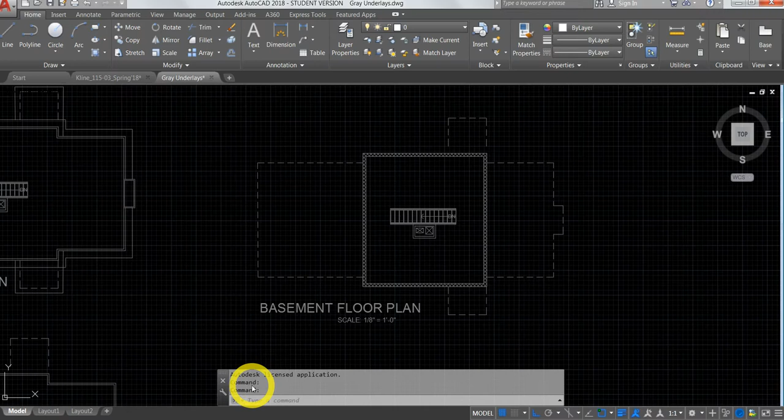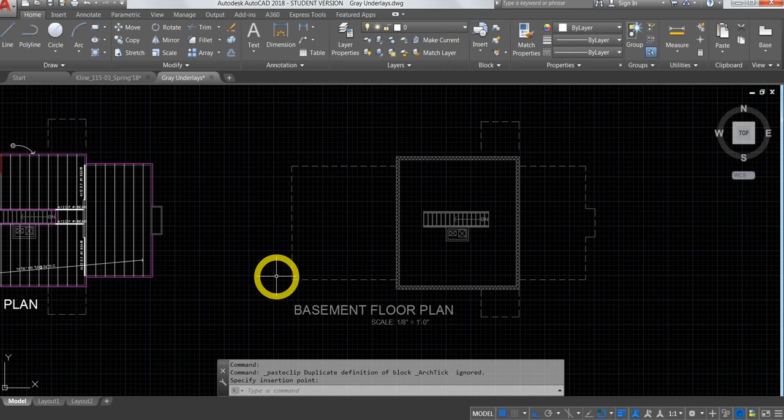All right, so I'm going to start again on a fresh gray underlay, and this time we're going to start with our basement floor plan. Let's just go ahead and highlight here. I'm going to copy, Control C, Control V, and just slide it over here for now. We're going to format these probably in the next video just to show you how I want these to print out. Okay, so now we've got our basement.

I'm going to make sure my 0, or just my white line, is turned on. So first I'm just going to go ahead and trace, because remember this is my outside wall, so I'm just going to draw a solid white line. This looks a little thick, but we'll fix that in a minute. Okay, so now this is the outside of my garage concrete stem wall. And again, if you want to refer back to this as you're drawing, it's great—this is page 43 of our packet E. But again, I just drew this outside edge, or if I were to even draw it here, of this stem wall right here.

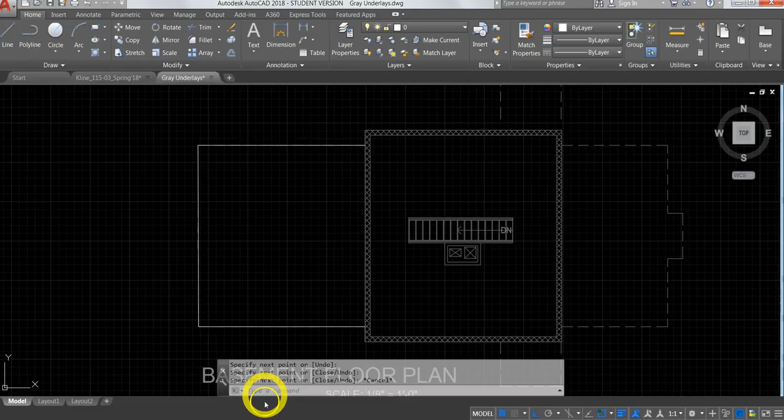Okay, so that's where we're going to start on all sides of our floor plan. And now that we've got one of those, we're just going to go ahead and offset this. I'm going to go ahead and offset this 6 inches to the inside. Click line, offset, 6 inches is highlighted, click, click, and click.

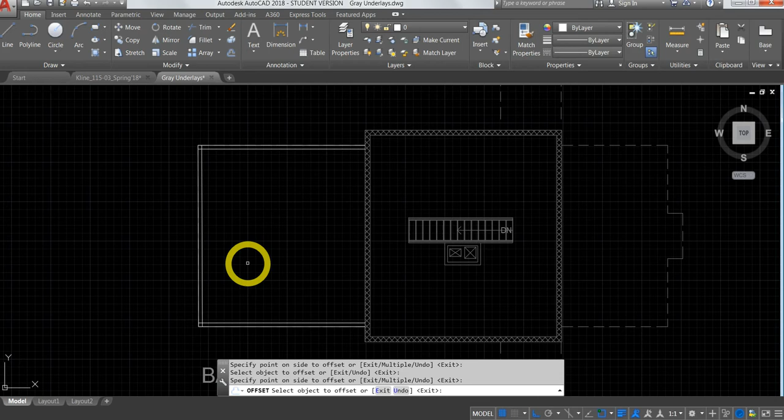Click and click. Okay, and once my offset tool is still highlighted, I'm just going to go ahead and draw in my footings that are going to be dashed below. So with my offset tool still selected, I'm just going to go ahead and type in 6—oh, you know, we're at 6 already, so we're okay. So this will make sense in a minute, but I'm just going to go ahead and offset another 6 inches from both lines. So we've got a lot of lines here, which is okay.

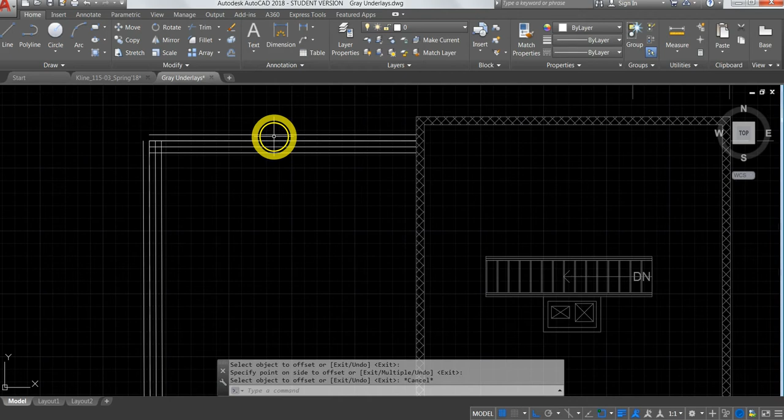Okay, and then the first step really is to clean them up, or to identify—but I just want to identify this outside line I just drew. So these outside lines are going to be our footing below that we're not going to see, so I'm just going to go ahead and make these dashed so they're showing up here.

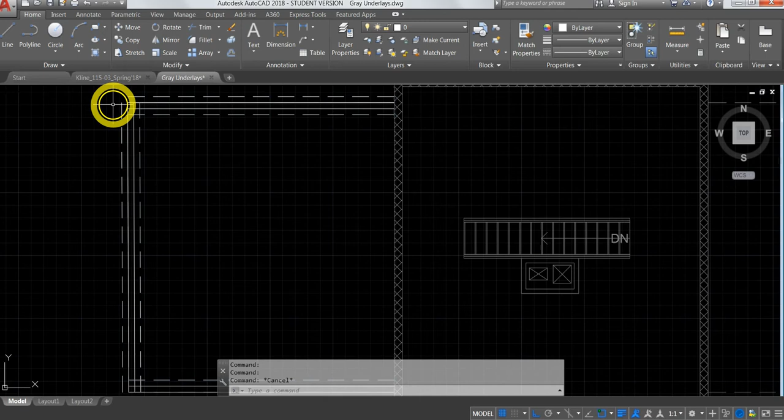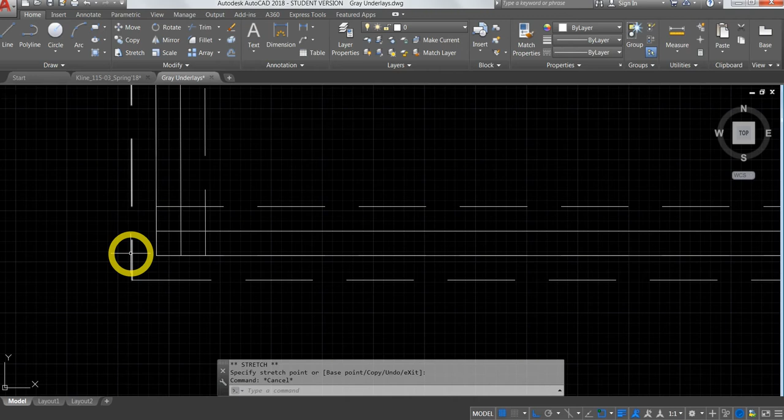There's not too much cleanup to do on these. The big thing—yeah, let's just go ahead and do it the quick way. So I'm just going to go ahead and drag this line over, and I'm going to do the same thing on my bottom corner. And then after that, I'm just going to go ahead and trim everything. Again, we've gone over this in class, but I'm just highlighting which line I want it to match up with, and I'm not clicking over it, just hovering over it, and then it gives me that little X. Okay, so now that we've got a bunch of lines, I'm just going to highlight all of them, go up here to my trim tool, and start cleaning up.

So again, I don't want anything coming inside—this will start making inside my stem wall. Cleaning that up here, cleaning up that here. So that's what a good looking corner looks like. Come down here, same thing—I'm just cleaning up all these lines.

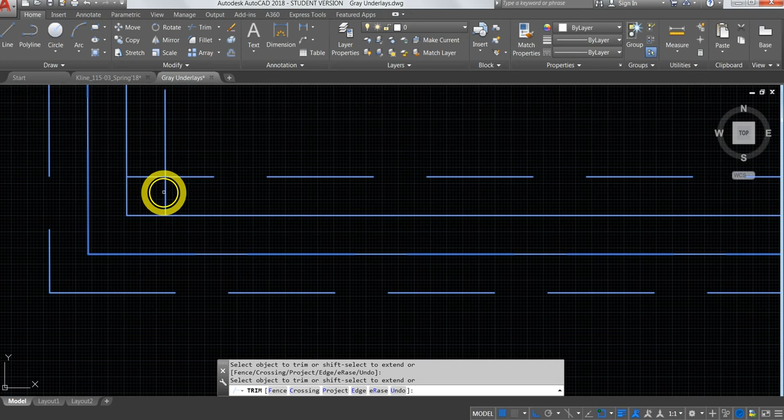Okay, hitting escape so I can see what it looks like. And I'm just going to go ahead and do this right away so you can start seeing what's going on. So I'm going to type hatch.

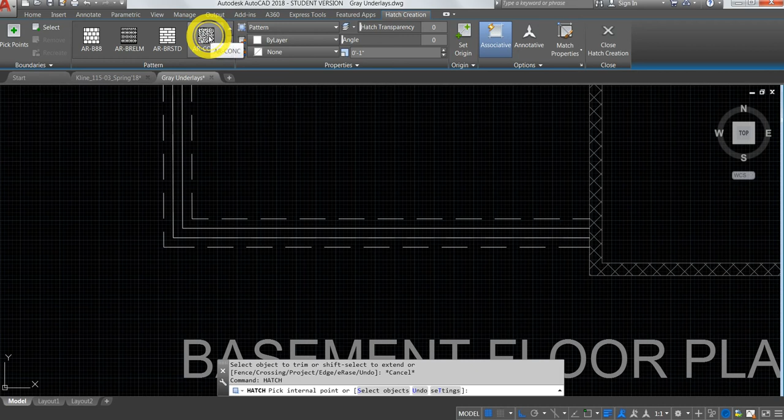The icon will show up, and I'm going to go down to concrete, AR Conc. I'm going to go ahead and click inside that area. So now you'll see we just created a concrete stem wall with a footing below.

We're going to do this exact same thing on this side. This thing's annoying, let's see if I can move this. There we go, yeah, it's the exact same thing. We're going to make our stem wall and our footing the same size over our crawl space.

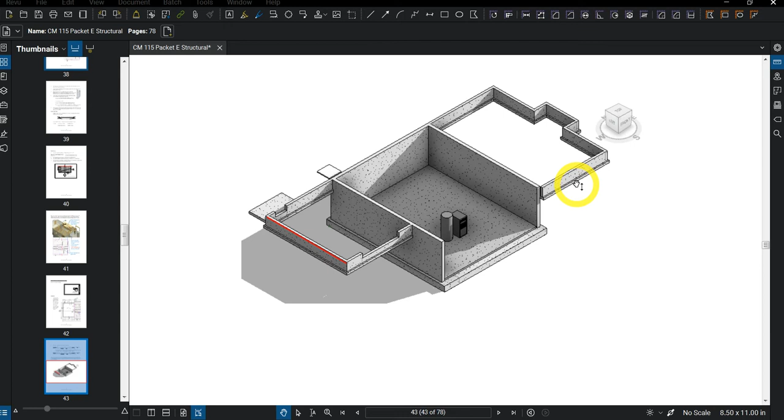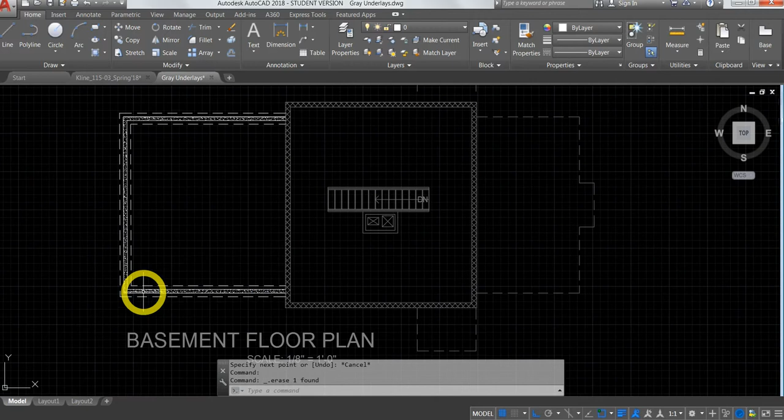We can go ahead and do that now. Just for the sake of time, we're not going to do that this class, but here's how this would look. Remember we have our garage cut out, so we would see another line here, vertical, and another line here, but don't worry about that. If you already did it, great, but don't worry about that. Okay, so same step over here.

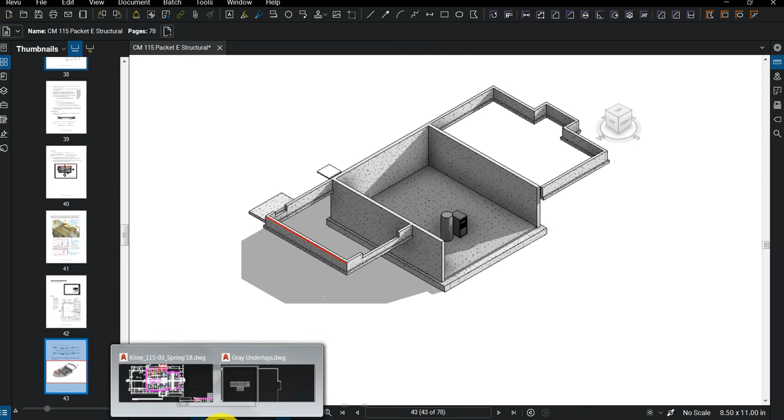So again, I'm just going to be highlighting my outside lines. I can be referring back to this, but you want to draw your footing all the way around your chimney. Yes, you may have brick going down, but I'm just going to draw it in because I think this is the right way to do it.

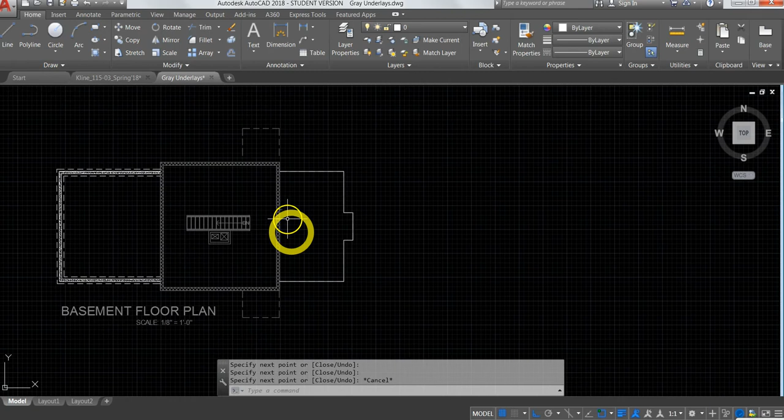Okay, same step. We're just going to go ahead. My offset tool is still turned on at 6 inches. I'm going to hit enter. This box shows up, so I'm offsetting outside, because that was highlighting the exterior wall.

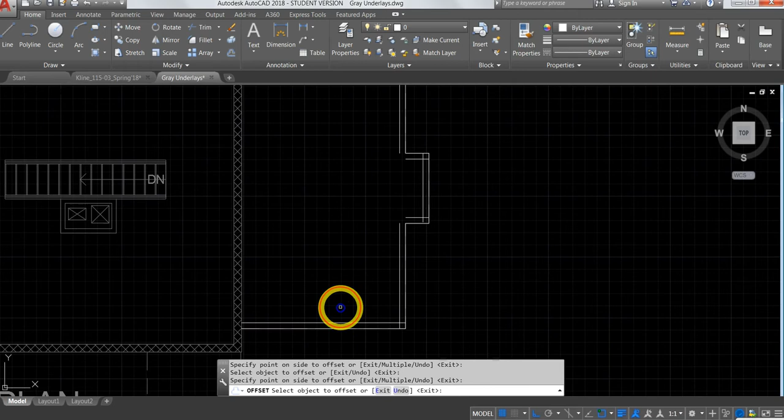Okay, and I'm not going to clean up these lines just for time's sake, but I'm just going to go ahead and draw my footing. Again, so I'm offsetting both outside lines. I'll clean up one wall. Offset everything.

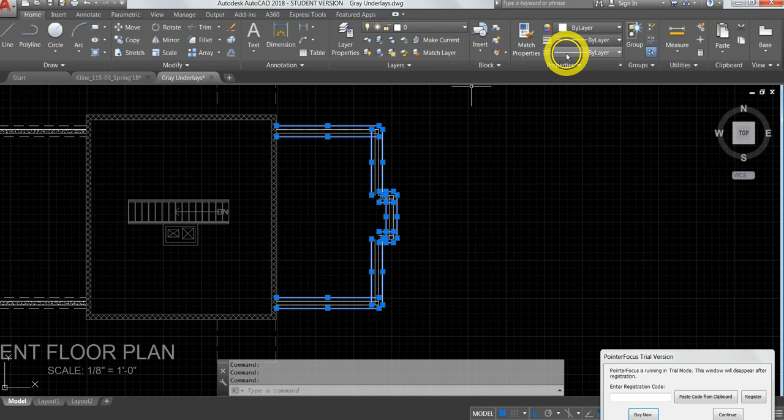Okay, and then kind of the same step. We're going to color the most outside lines dashed, because again, those are our footings below that we're not really seeing in our floor plan, but they're there, just like how you draw your details. Getting close. All right, I'm going to make these dashed lines, and again, go ahead and just clean them up just like the other one.

I'm going to clean up a corner, but make sure you just clean up everything. So again, I don't want anything showing up inside my stem wall. Cleaning up these corners.

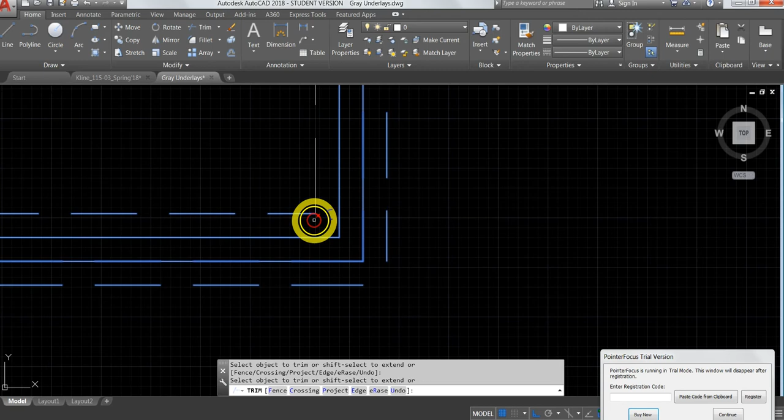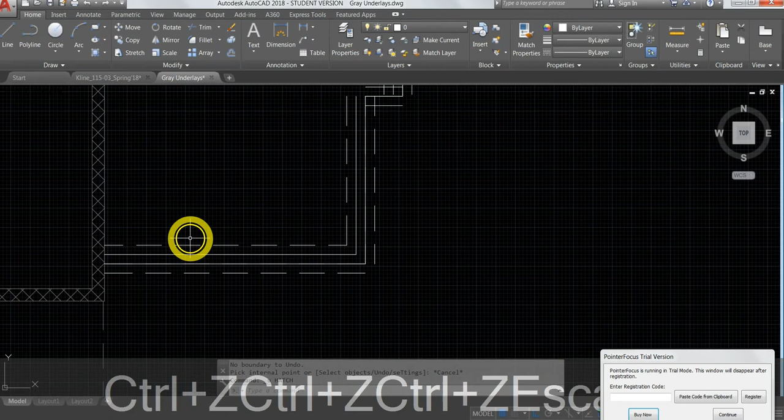A quick check too, you could even just leave those dashed lines as is, but those look pretty good. When you go to hatch, which I'm going to right here, after you clean up all your lines, if I click inside this footing - see, it looks like I forgot to tell you, make sure you close off your box over here. It won't sometimes recognize the gray. Oh see, and I didn't close off over here.

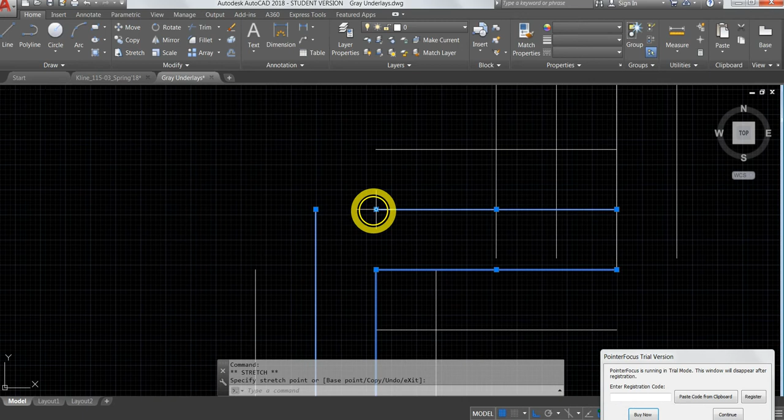Awesome, so I did a great example. I'm just going to go ahead and close off this one so I can show you how the hatch should work. So again, once you clean up everything - I haven't, halfway done - whoops, hatch, there we go. And if you click inside this area, it'll only go to what's enclosed. So once you're cleaned up, it should do the whole footing automatically.

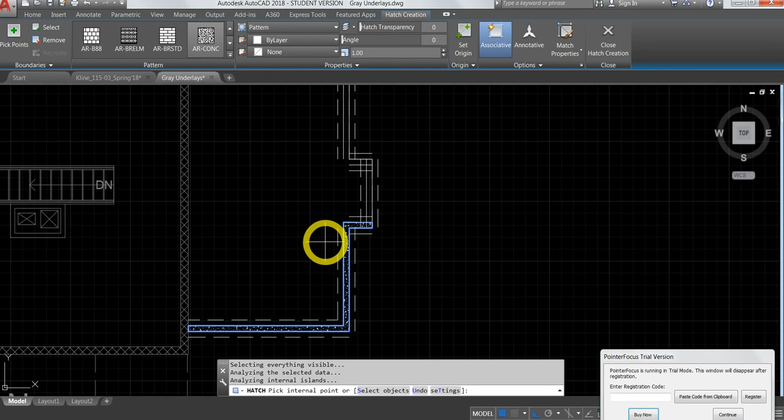Okay, so those are really our stem wall and our footings for our two major sections. All we have left to do, I put in this hatch pattern for you already, so what we're going to do is highlight the whole thing right here, and just highlight these lines as well. I want all my perimeter lines for this, and we're going to go ahead and color these white. Make sure those are white. You do not need to draw over or gray your gray lines. Just go ahead and change the properties.

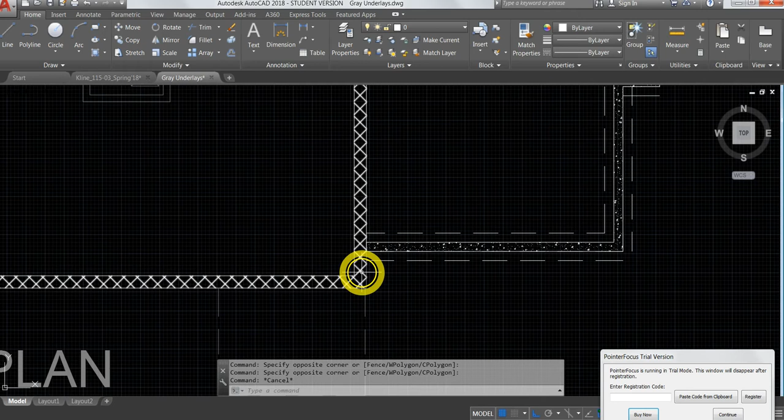It looks like I missed a few. That's okay, just check, let's see. Yep, I missed a few lines, but make sure these are all white so they're popping up.

Okay, then all we have left to do on our main house is draw this basement footing. This basement footing, as you remember, was a little bigger - it's a retaining footing. I don't have my notes in front of me, but I think it was a 12-inch heel and then 4 feet from the outside face. So that's what we're going to do.

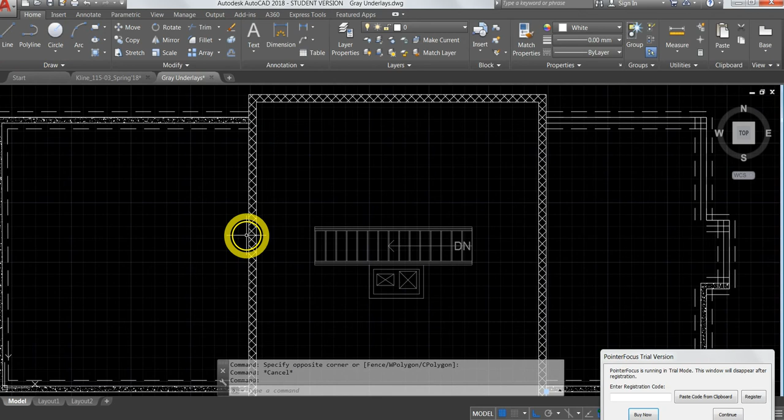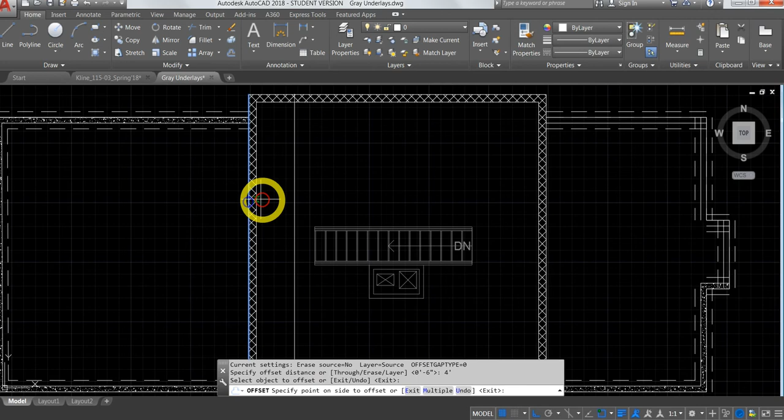Do whatever you want, all we want to show up right here, which I'll show you, is this footing. Since it's retaining, I'm going to go ahead and offset that wall first. I'm going to highlight this outside face, and I'm going to do this 4-foot one first, just so you can see how extreme this looks. So 4 feet - clicking on this outside wall and dragging it in.

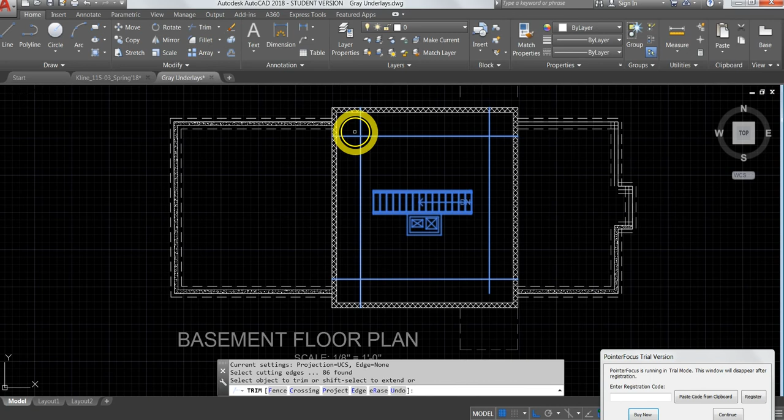Looks like I picked a bad line, but it's totally fine. Now what we're going to do is highlight these and go to trim. We're going to trim these. And this is where the center line method comes into play, because this bearing footing extends so far into our house.

I'm just going to go ahead and highlight these lines and make them dashed. Then all we have left is to offset the outside footings as well. So 12 inches here, same thing on the outside. Seems a little big, that's okay, let's stick with it. 12 inches in all directions.

So again, we're going to clean up all these lines and connect them to each other, which I'm not going to do, and then leave them as is. Now we are showing pretty much all of our footing systems. Now we're going to go ahead and draw in. We don't have a ton of floor framing to show.

Again, porches will be extra credit if you feel like you need it or want it. But I'm just going to go ahead and draw it without the porches. Sorry, I'm scrolling through my notes here, can't be dual screening here.

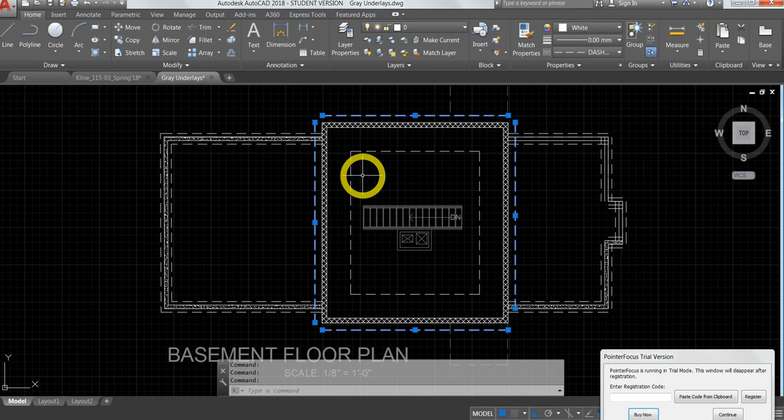All right, so this is going to be almost the same setup as we did over here. Some people try copying and pasting, I think it's kind of a pain, so I'm just going to again just kind of draw this.

Now I'm going to go up here and turn this line to pink or magenta. You know what, yeah, this is identical to what we did in the last video. So really, I don't want to waste your all's time, but I'm just going to go ahead and show the first couple steps and show the only thing that's different with this setup.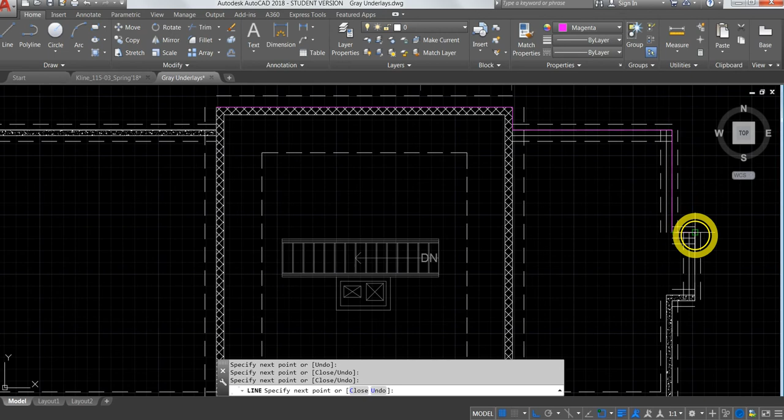Okay, so my magenta line's turned on. Again, I'm going to highlight pretty much my whole perimeter. Ooh, mine gets a little ugly because I haven't cleaned it up. That's okay, so this is my whole perimeter wall. Okay, so this is my rim joist or my girder.

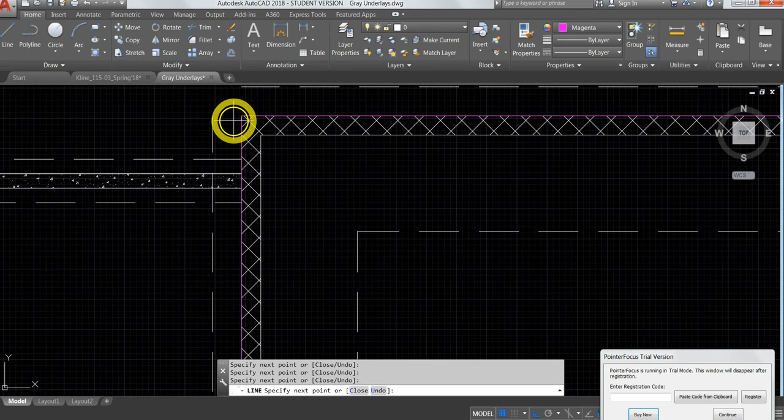And I just have one last section to do that for, so I'm going to use my rectangle tool up here, my pink still turned on. We're going to do the same thing around our stairs. But remember, my outside line, I haven't deleted my stair rail, so it kind of goes right to the center of these lines.

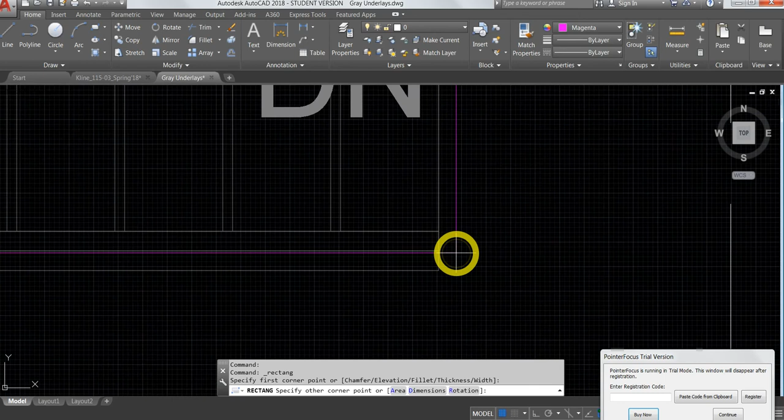Okay, so now we've got our perimeter girder called out in pink, and the floor joists are going to be identical except for one location. Over here we've got this crawl space, and this is kind of just like a lot of SLO San Luis Obispo homes. They provide plumbing, electrical, all running under your house, but here we've got a basement, so a little different system over here.

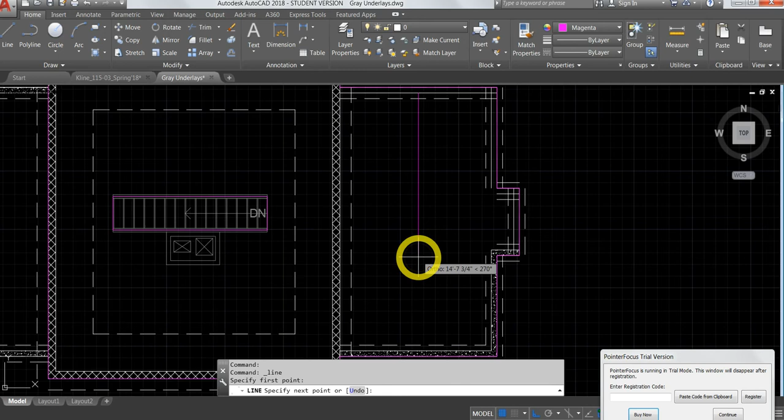So first step, I'm just going to go ahead and find my midpoint. I'm just going to hover over here. Perfect, it found a midpoint. This is just a guideline, so I'm just going to draw it about more than halfway down. Same step here, I want to find my midpoint.

Okay, so now that I've got this midpoint here, there's a number of different ways to do this. I'm going to draw it kind of the ugly way, but do it however you want. We just need to go ahead and draw, let's make this a little bit bigger. So we're going to make this a 3 foot by 3 foot wide little pier footing that's going to hold up a girder, and this will make sense soon.

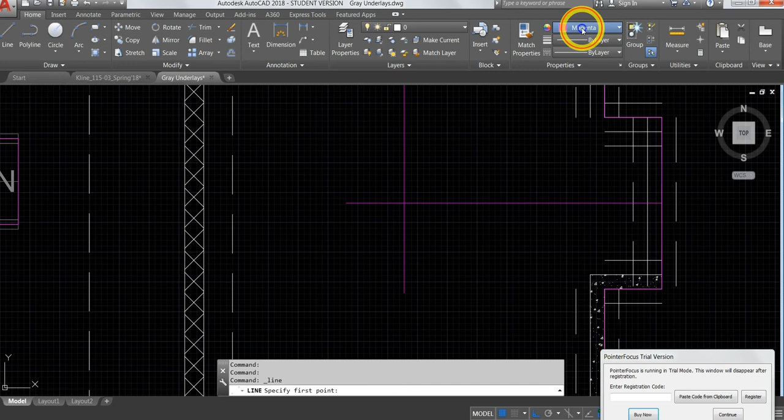So I'm going to change my color back to white here, and I'm just trying to find the outside face of this so I can draw an offset. From this midpoint, I'm going to come over 1.5 feet. You know what, for simplicity's sake, I'm just going to make it 4 foot by 4 foot. So I'm going to come over 2 feet. Whoops, not 2 inches.

2 feet. Okay, and then from this point, I'm going to come down 2 feet. Again, this is kind of your bottom right-hand corner. So once you found this, I'm going to draw a full line up to be 4 foot by 4 foot by 4 foot. That looks massive. That's okay, we've got a lot of load calcing here, California.

So we're going to go ahead and just delete my guidelines. And now we've got this, wow, that is big, but that's okay. It gives us a good example. So now we've got this huge pad footing. Oh, too soon, I forgot, sorry. Go ahead and Control Z.

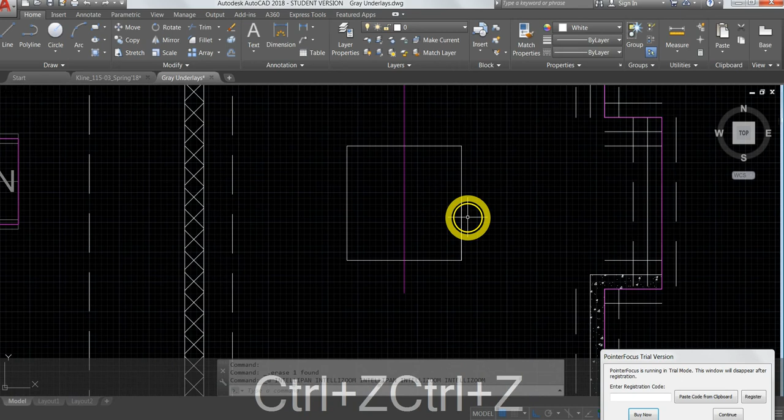I still want these center lines showing up because I'm going to draw a pier using my circle button. Clicking on my midpoint, and we're just going to go ahead. This is asking down below for the diameter, it looks like. So I'm going to make an 18-inch. Whoa, nope, that's asking for... is it radius? Let's see. Let's do 9 inches, that looks a lot better. Go ahead and type 9. And you can always adjust that too by highlighting it, and once you start clicking on it, it'll adjust it here. So what we just did is made a 9.

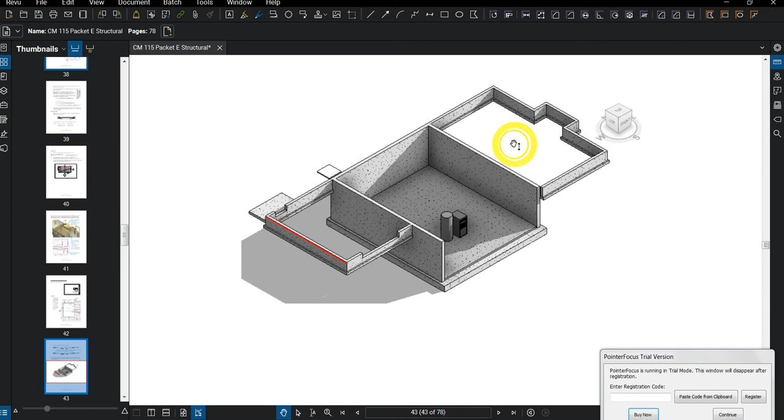I don't think this shows up, and yeah, it doesn't. But we just created this pad footing right here with a pier that's going up, and it will make sense in a minute.

So now I can go ahead and delete these guidelines. And yes, if you're calling me out right now, you are totally correct. So we can change these to dash lines. And then I would probably fill in, oops, hatch this in concrete as well. So again, our footing below that we're not seeing, and then our pier that we would be seeing.

Okay, so now that we got this point, let's just go ahead and draw in this massive girder that's going to be supported. So again, I just like going, oh, you know what, it should line up. So let's go ahead and click on our center point here. Perfect, mine's lining up. So this girder is running here

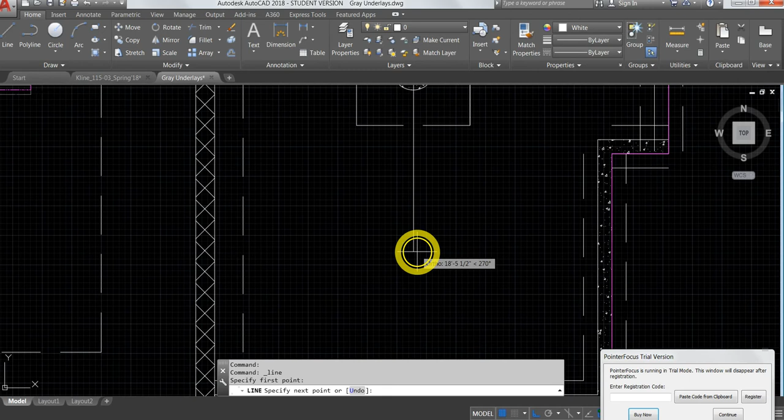to here. And again, I'm just going to adjust the properties as we go here. So this is just a standard line. And I'm just going to go ahead and blow up the properties because, again, this is a little thicker beam than our standard beams, so I'm going to make that a little bigger.

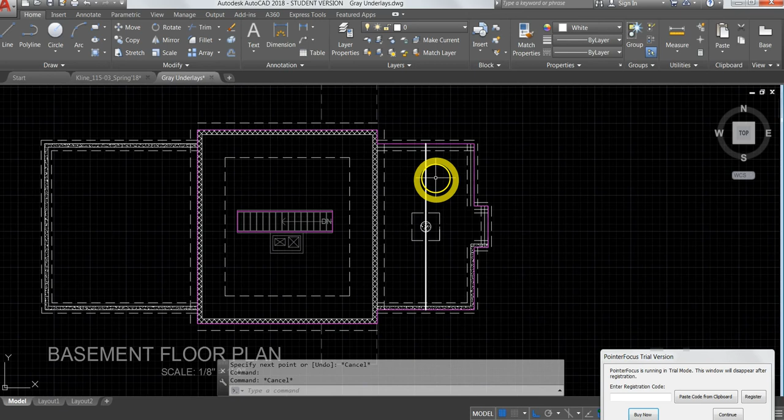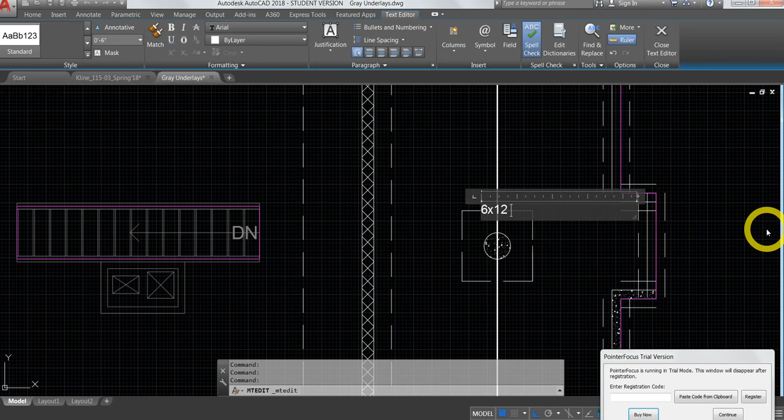And then I'm going to go ahead and steal a text from one of my previous ones over here and go ahead and call out what we just drew. So this is going to be a 6 by 12 Douglas fir number 1 girder. And again, if we remember our terms, girders are going to be supporting our joists.

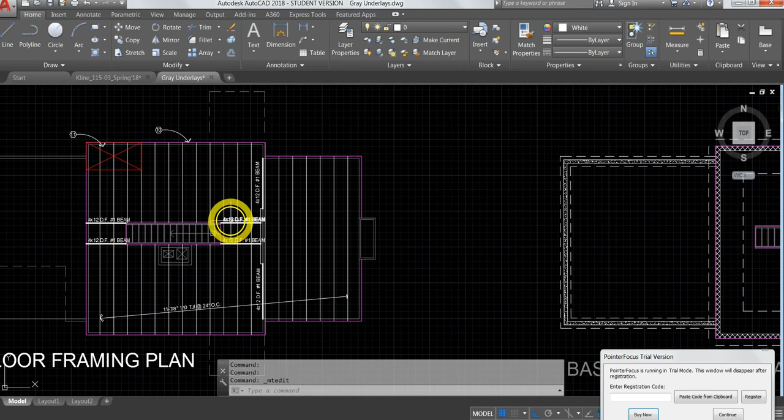So again, our joists are going to line up exactly the same on our basement, just because they're able to be supported by these internal beams from here to here. But on this side, now that we've got this girder running this whole direction, I'm going to go ahead and

draw in a few of these just to show you. I'm going to go ahead and start my spacing. So just be careful here, because our joists are going to run on top of the CMU wall to here. I'm going to delete this line later, but it's just to show you. And I'm going to offset this one 2 feet. Okay, and you can even delete this one now, don't want to forget about it.

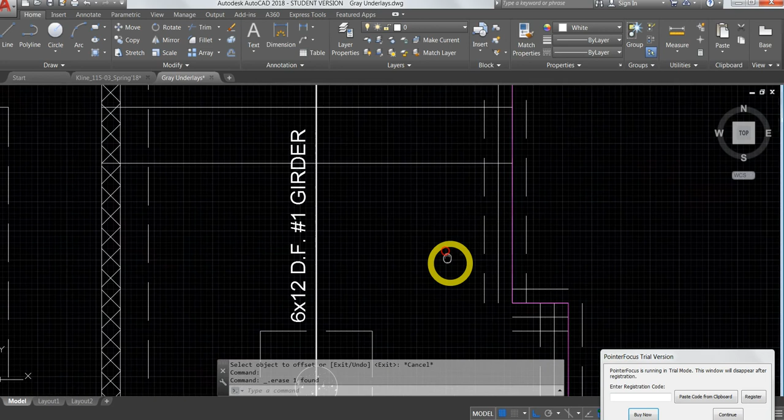But here are all of our joists that are going to be running from on top of this wall, supported by this girder below, and then on top of this stem wall as well.

So go ahead and keep going here. Ooh, I got lucky, it's lining up with something, but just make sure you extend once you get over here. It won't line up here. Yeah, but once you get over here, go ahead and extend this one to be on top of your stem wall.

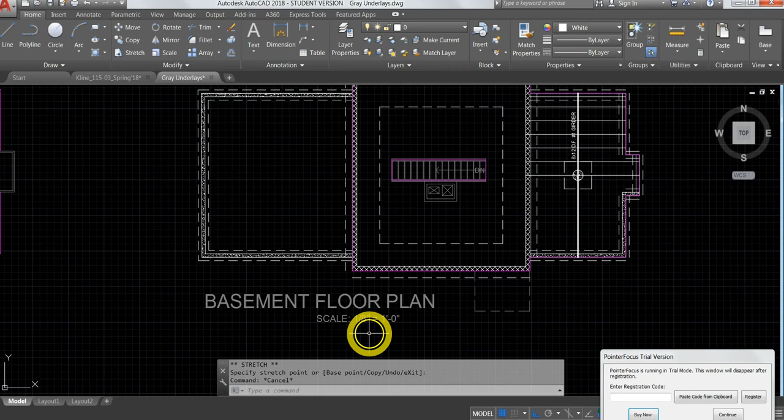Okay, so we are 80% done here. So again, go ahead and check out, what page is this? Page 59 in your packet E. Again, this just kind of lays out what it should look like in the end, except for your callouts. Remember, just don't worry about these callouts. But the only thing different you're going to be doing on this plan, forgot to name this here. So this is going to be my floor framing.

I'll change the color later. Floor framing and foundation. Whoops, plan just got thrown off here.

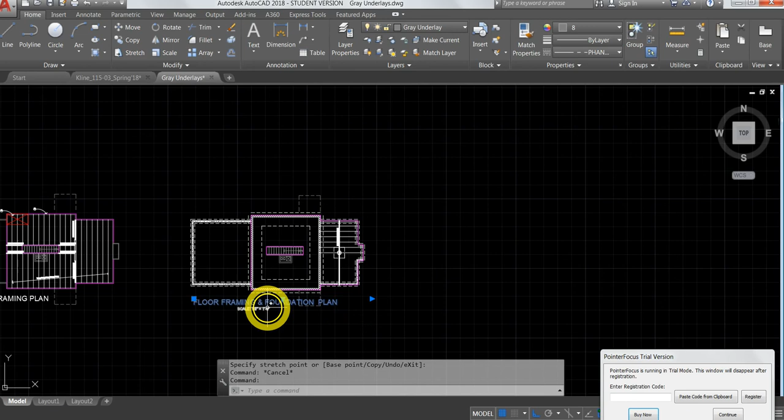So I'm just going to adjust this to be a little bigger and make both of these text white. Okay, I'm just going to move this down just in case you're doing your porch out here.

Okay, so last step on this, once you get your floor joists ran and your callouts in, I'm just going to keep, to show you real quick, the beams the same as what I did on the level above.

So I'll have a beam here as well as a beam from here to here. Those aren't straight lines, but you get the point.

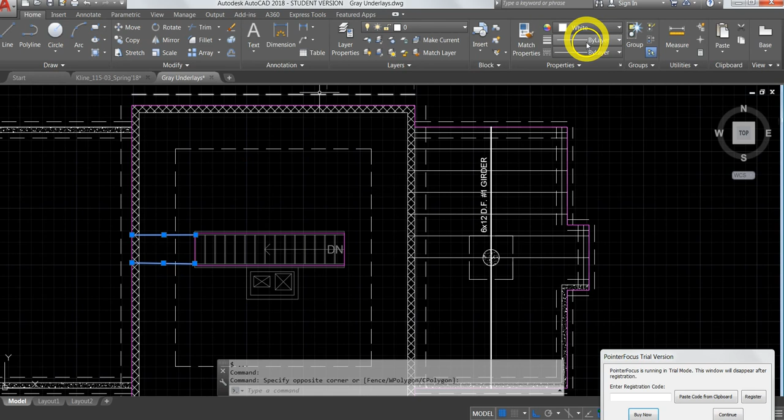So these beams again are just going to be a little, could even just copy paste these, but these beams are going to be a little thicker. So I'm going to expand those, and again I'm just copying the same layout.

To make it easy for my framer as these two. So again, I'm just going to do 1, 2, 3, 4 beams the same.

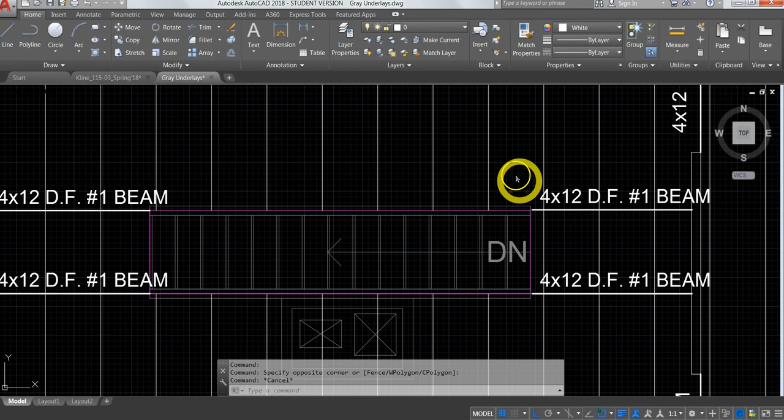Don't worry about these beams right here, 1, 2 on this wall, because again we've got a CMU wall right here. So I'm just going to draw 1, 2, run all my joists.

Okay, and then last step on this one, we want a full-on dimension plan for our first floor, just to make it easy on our layout, and really all the trades to follow.

So if you did not follow my dimensions, I think that was in the roof framing when we did our truss, go ahead and go back to that real quick just to make sure. But our dimensions should be set.

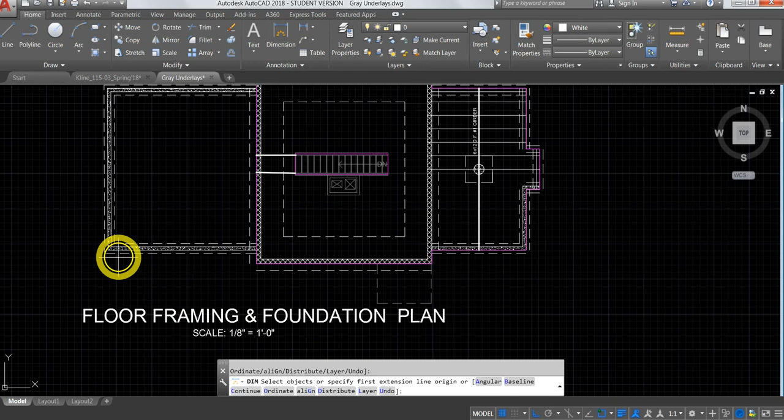So again, I'm going to do a full-on dimension layout, and this is really just calling out every single major line that we're seeing here. So on this face, this is all I'm seeing, and you'll see this will start making sense here in a little bit. But I'm going to pull this out a little bit.

And let's just say you did your porch, I would pull this one out to about, yeah, I can adjust these later, but you're going to pull any minor dimensions out to one tier, like I'm doing right here, and then your major dimensions, or like your full lines, full length of the wall, a little bit further.

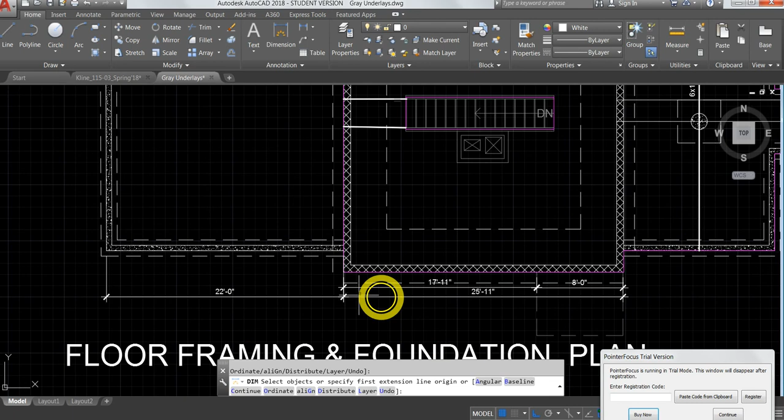So I want these dimensions to line up nice and smooth like this.

And you'll see you're going to start dimension, and don't get crazy like page 59 if you use that as a reference. This is as much as I want to see type of thing. You don't have to draw too many here.

Okay, and let's just do an example, but you're going to do pretty much your X and Y walls. So this one I'm not going to drag all the way out here. It's kind of annoying, it gets in the way. So I just leave my 2-foot dimension here.

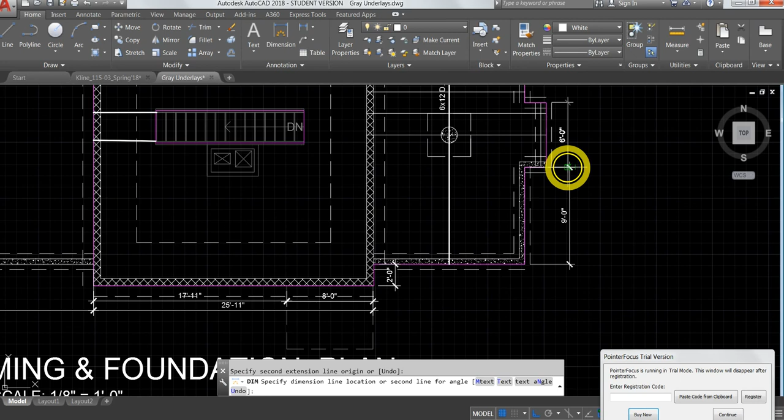But on this side, I'm going to go ahead and pull a lot of these dimensions. So I'm going to go fireplace. And you can see too, I'm dimensioning from my outside face of walls. And here as well, I'm just going to go ahead and do this one.

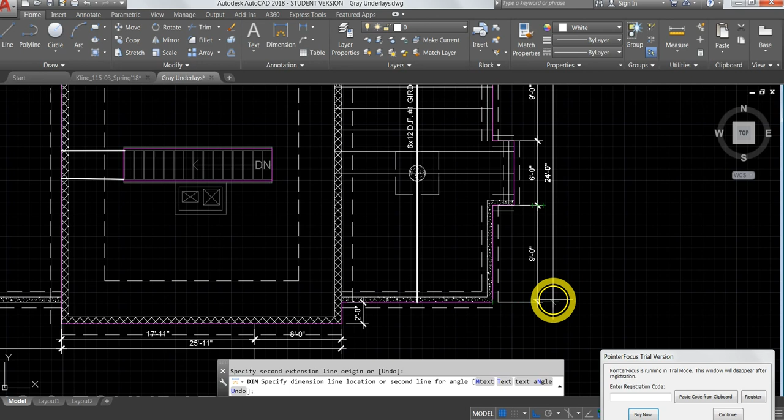Pull this out. So again, this is all of my walls jogging, but then I want to go ahead and highlight this overall wall just like this too. So I'm just pulling that out past the minor walls.

Okay, so this is very close. We're probably got like a half hour left here of laying out the rest of your floor joists as well as your callouts. So again, I gave you all the callouts here.

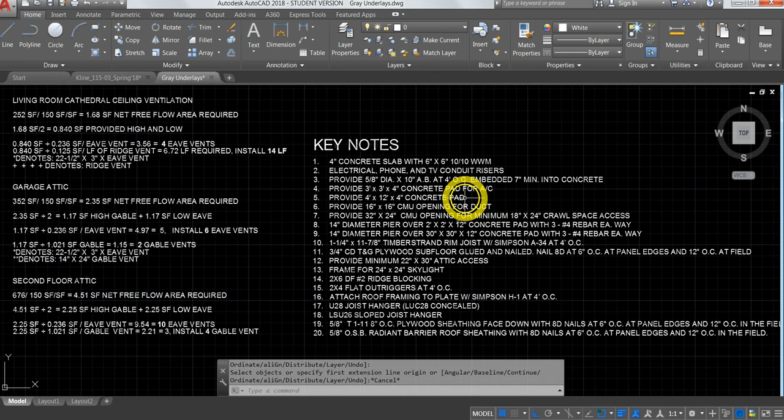So just go ahead and match these on some of your floor plans. And just be careful not to copy exactly what these notes show, because again, I've adjusted these callouts a little bit. So just kind of reference these before you're doing that.

All right, and that is it. Next video, we're just going to be...